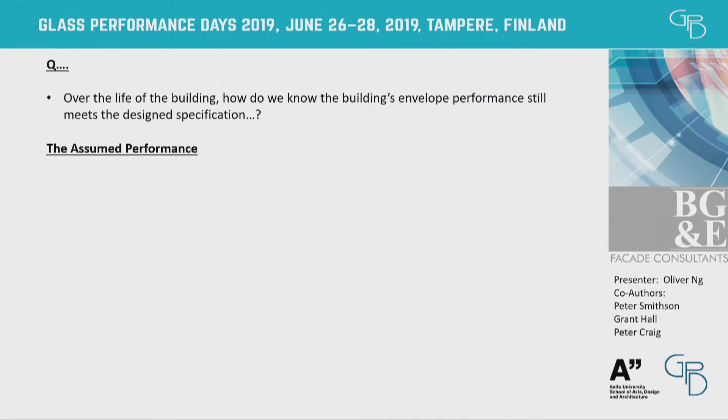So how it starts in the design phase is the mechanical engineer will always assume something. When he designs the system, the lighting and whatnot, he'll go, all right, we're going to lose so much energy, or we're going to get so much energy from the north, south, east, west. We look at how the facade performs in terms of U value, solar heat gain coefficient, heat loss, heat gains, and so on and so forth.

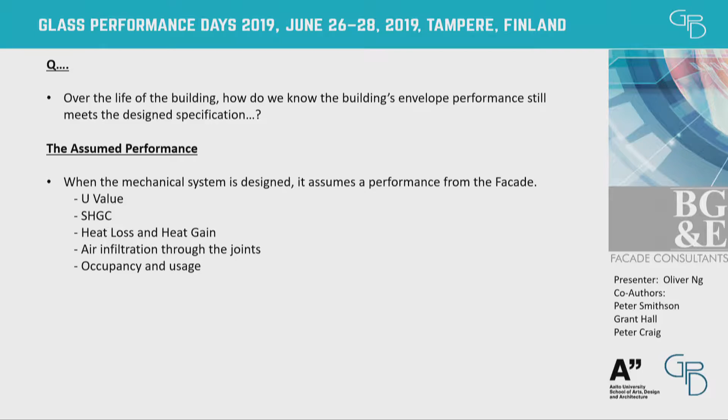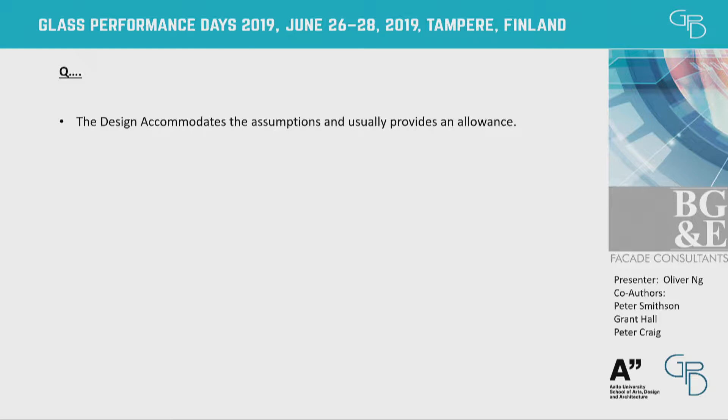They also assume there's air infiltration that goes through the facade, and they accommodate it with air changes, plus occupancy and usage, allowing for additional changes. So the design accommodates an assumption, usually an allowance, and normally it's designed on peak loads.

Now, the facade, before we construct it, we normally test it - for its performance from air, water penetration, structure, and whatnot. That's usually before the facade's installed, and we'll call it day one. And we say, yep, take air, take water, great. And that's usually a 2.5 story by 3 panels wide, maybe a corner if you're lucky, and that's made somewhere in a test lab.

And then we build this 60, 70, 80, 90-story building. And then what happens? It would be a good idea, Tim, if we went back and had a look at how the facade is performing over there.

So really what we're saying is over time, there's not enough information about how the facade's performing. Bear in mind, I'm not talking about glass - there's a lot of technologies in glass. I'm talking about a facade system that's pretty much been very similar. Maybe in the last 10 years we've got thermal breaks, but I'm talking about the whole facade system with the glass in its operation, with the blinds, with the air conditioning system, all running together.

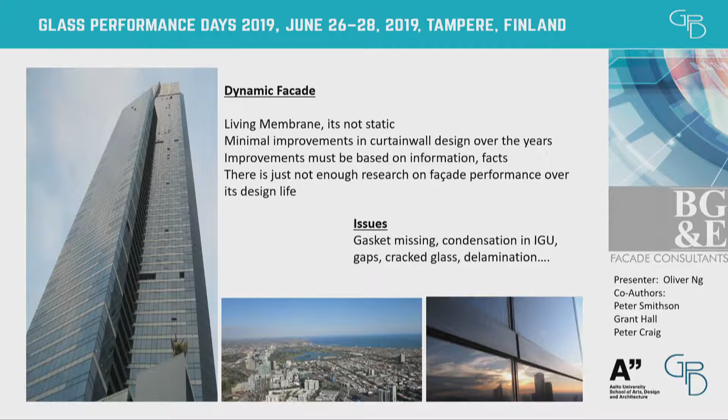That's why I put the Eureka up there - we did an inspection on the Eureka not too long ago, and we almost spent a month on this building going up and down. But really, what do we get out of it? A little bit - we had gaskets missing, condensation in an IGU, gaps, cracks, delamination issues, and all that. Great, the client can go fix all that up. But really, how the facade's performing, because Eureka is probably about 12 years old now, compared to when it was tested and when the mechanical systems were all assumed from day one - nobody knows.

We don't know, the client doesn't know. There's a building in the Middle East, beautifully built, and the air conditioning system was not really working very well. There were some tests done, and they found that the building was leaking quite a lot. We found that the facade was a major contributor to that.

So really, what we're doing is we're working on a remotely embedded, real-time monitored cellular-based sensor technology that we can actually get information 24/7, and monitor the facade performance over time compared to its published data or assumed performances. The idea is over time we can analyze the data and use it in future developments. The areas we're talking about are solar radiation, cavities, measuring temperatures in and out, and we can measure air leakages in the facade systems as well.

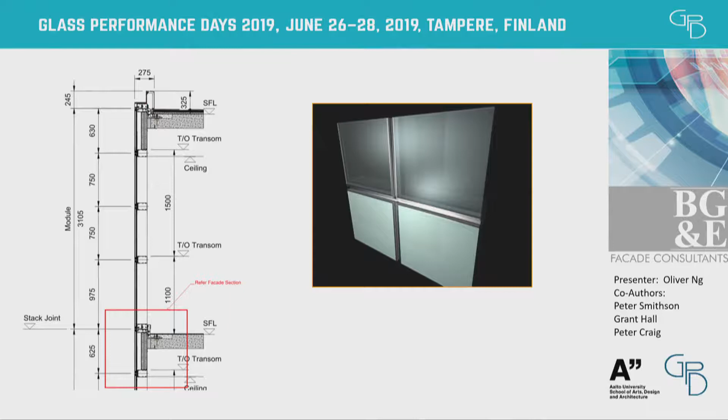And that's a section through a transom, for example, or a stack in this case. We look at incident solar radiation and transmitted solar radiation, so we can put a sensor on the inside and the outside.

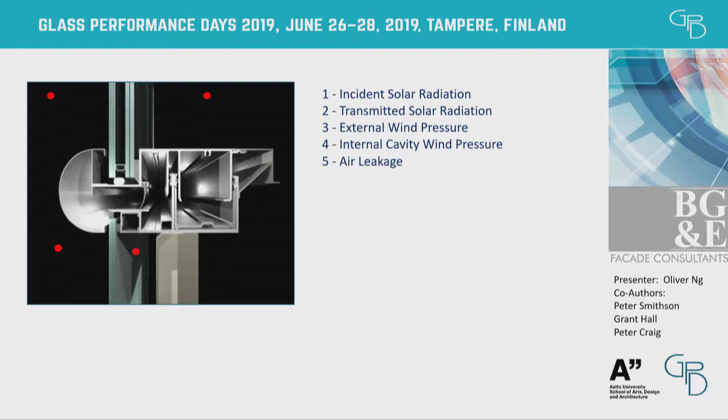We can look at external wind pressures, the cavity wind pressures, and the air leakage by putting sensors in three different spots, for example. Surface temperature of the glass on the outside and on the inside.

We can even put sensors into your pressure equalized zone and actually see how that is performing, surface temperature on the aluminum systems itself on the inside, again on the rain screen area and maybe somewhere there.

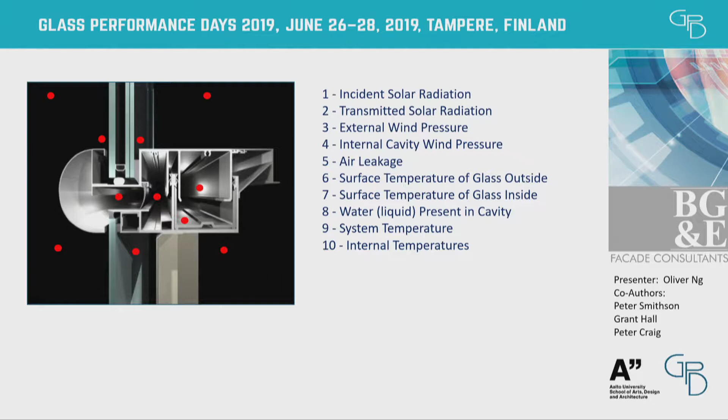And again, it's all tailor-made. It doesn't have to be as it is. It all depends on what information you want to get out of it, what we want to get out of it, and what the mechanical engineer that we'll work with needs to get out of it.

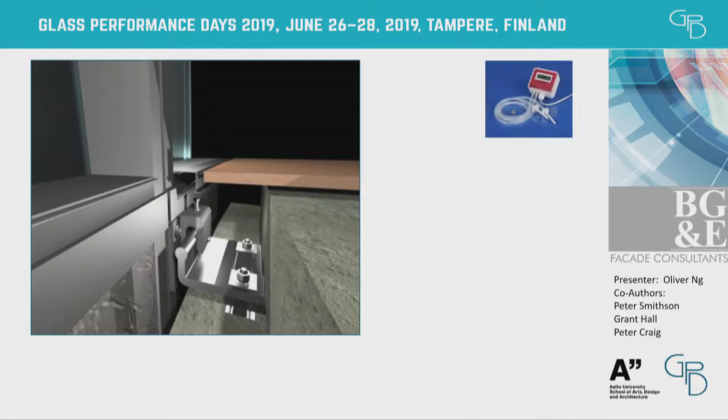So these are just some of the equipments that we use or we've looked at.

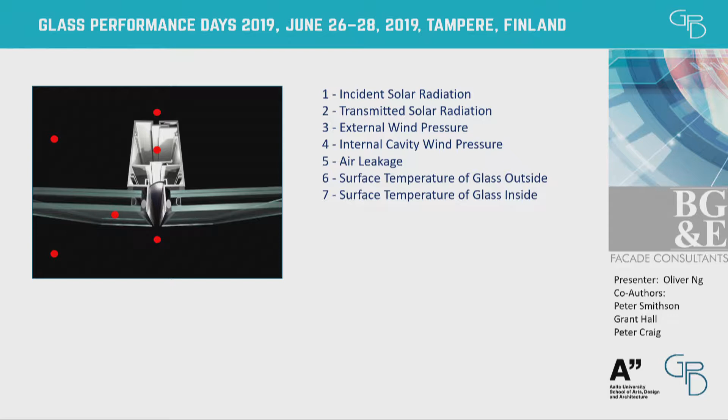So again, the same issue, but just looking at it from, say, a cross-section through the mullion, for example, and having sensors in various spots to actually monitor how the facade system's performing.

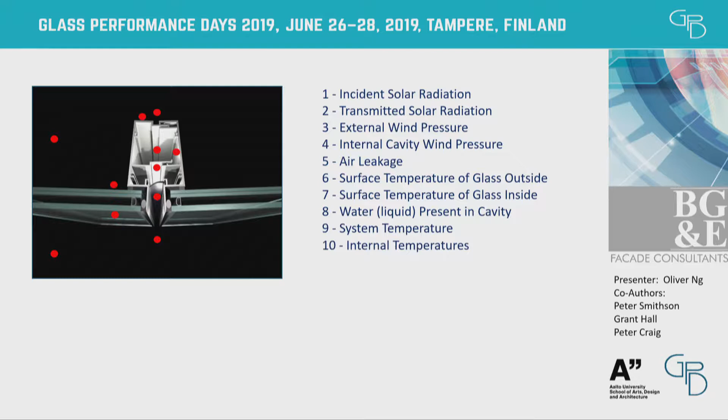So the trick in this whole thing is actually the sensors, right? Again, we're not inventing any new technology here.

These are all in the market. But again, we're putting these sensors in areas that are hot, humid, and also not really accessible.

So once we put the sensors in, it's really hard to get in there and pull it out if it fails. So really, the key to these sensors is they need to be durable and long-lasting.

It needs to be able to take extreme heat and moisture. It needs to be self-calibrating as well because it's really hard to get in there.

It needs to be accessible, so it's about how we actually make the hole in the system, get the sensors in there, and if we had to pull it out, we could do it, and also able to upgrade.

So we can actually add more sensors, or if a new sensor comes up that's more up to date, we can actually use that, and also adaptable to 5G in the future.

So really, what we're looking at is, say, you can have these sensors on various parts of the building, north, south, east, west, somewhere at the top, somewhere in the middle.

Maybe at the ground. They're all connected to a data logger. The data logger, in this case, can take up to 32 sensors for an area.

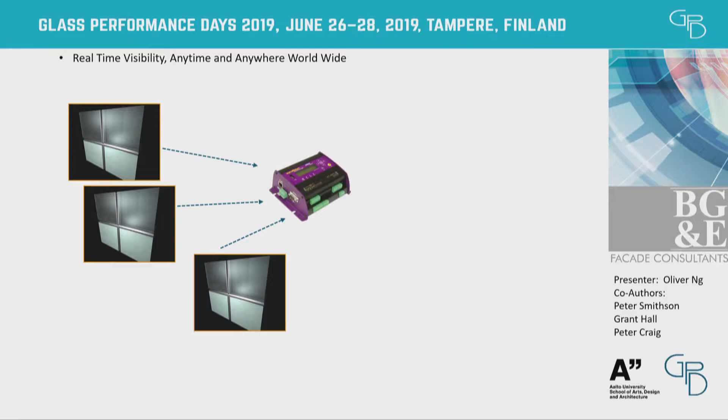That transmits through Wi-Fi to a cloud system, and that then comes back to us in the form of a dashboard, and also a phone-based app.

So basically, you can have a look on your phone, and you can actually see how your building performs as it is, in real-time data.

Now, having said all that, we're looking at gathering information over a period of 10 years. Roughly, that's in Australia, roughly 10 years is about how long facade warranties last.

Not lifespan, facade warranties last. So the whole idea is trying to understand how the facade performs over time. So does it drop immediately from day one? Does it take 5 years and then start deteriorating then? Is there a lot of movement?

So really some of this information is going to be quite boring, because if you look at a 10-year span, then obviously you're not going to see up and down that much. But that's the idea, right?

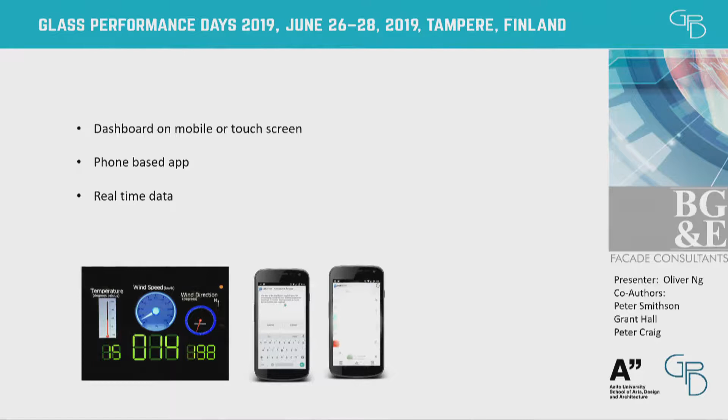And then you can get all this information immediately and also historically on your phone apps. And that's really what we've got at this moment. So what you can do is multiple locations. We've approached developers on multiple buildings, for example.

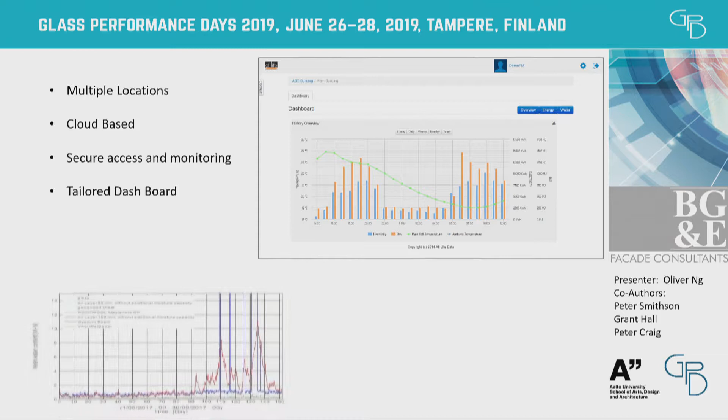It's all cloud-based, so we're working with a company that can provide all this security, and the dashboard is tailored to the company you're with. A good company would be a big developer with multiple buildings, and universities—they've got a big land stock.

So really what we're saying is smart reporting—tailor-make the information to suit what you need. We obviously know what we want from a facade design point of view, so we design facades to a certain extent. We put out specifications for facade contractors to meet, so we can tailor-make, amend, or improve our specification based on this information.

This can be for new buildings and also existing buildings. It all depends on how much information you want—you can also add to it along the way. What we think is the most important thing we'll get out of this is the historical data—how it actually performs over time.

Again, nothing new—we just think there's not enough information out there on facades, i.e. glass and frames. This allows us to actually monitor a facade 24/7.

So what we're saying is information is king. If you know what your facade's doing, you'll know exactly what you're dealing with if you want to make improvements. Your improvements are fact-based, not just guessing or assumption. It's real time, and there's no more guesswork.